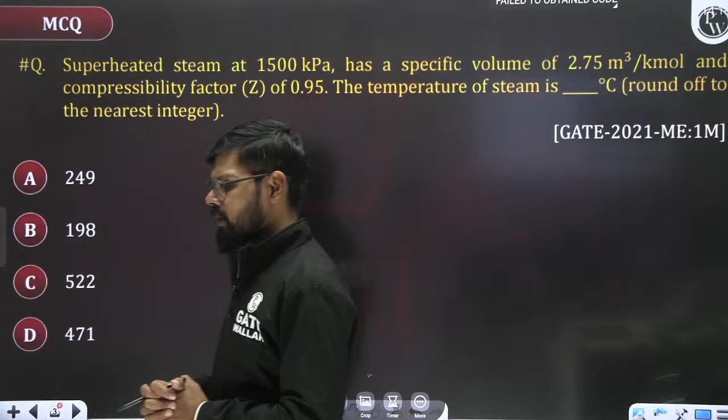In the first chapter of basic thermodynamics, mostly it is about basic concepts. In this chapter the most important topic is ideal gas, properties of ideal gas, and its mixture. I hope you know about it. So let me start with the very first question.

Here it is given that superheated steam at 1500 kilopascal has a specific volume of 2.75 meter cube per kilomole. So superheated steam at 1500 kilopascal.

So P value is how much given? Let me write here: P value is given as P = 1500 kilopascal, has a specific volume of 2.75 meter cube. Specific volume means V = 2.75 meter cube per kilomole. This is a specific volume given per mole.

It is given per mole, and the compressibility factor Z is given as 0.95. Now you need to find out the temperature of the steam. This superheated steam can be considered as an ideal gas. Even if it is not ideal gas but compressible, the compressibility factor is given, so we'll apply PV specific volume = Z R bar T.

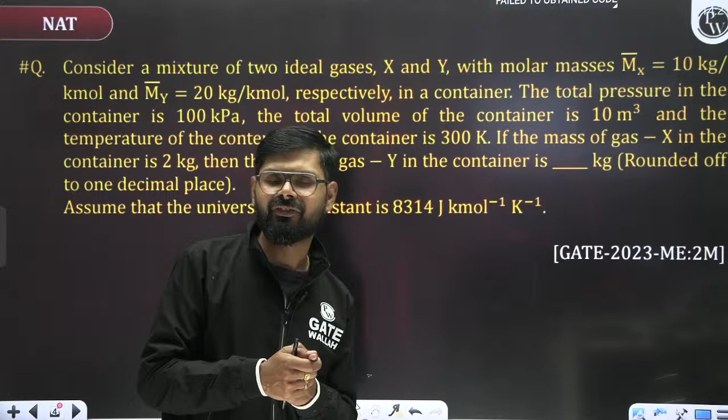The second topic is ideal gas and properties of ideal gas. The third one is thermometry or measurement of temperature, zeroth law of thermodynamics. But out of these three, the most important topic, meaning 70-80% chances if a question comes from the first chapter, it will come from ideal gas and its properties. Okay, just solve this particular problem.

Here it is given that consider a mixture of two ideal gases X and Y, with the molecular mass given. So molecular mass is given as 10 kg per kilomole, 10 kg per kilomole. This is the molecular weight of X.

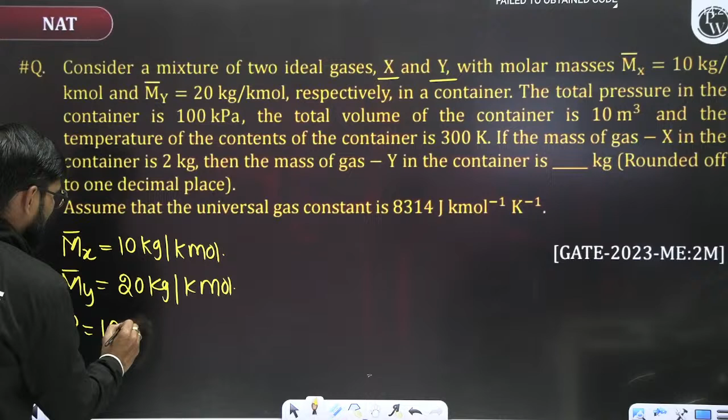Okay, so now look here. What is given? Mx value is given as 10 kg per kilomole, and the molecular weight of another gas Y is given as 20 kg per kilomole respectively in a container. The total pressure in the container is given as 100 kilopascal. The total volume of the container is 10 meter cube.

And the temperature of the contents of the container, what is the temperature value given? T is equal to 300 Kelvin.

Now, if the mass of the gas X in the container, mass of gas X, small m is representing what?

Today some problem happened, right? But okay, thank you Kuldeep Singh sir. Kuldeep Singh sir is the king of information, I think everyone knows about him very well.

So if I write the Mx value, what is the value of mx? Mass of X gas is 2 kg, and mass of Y you need to find out. This you need to find out. Solve it.

Everyone please solve this, it is really a very good question, a very good problem. See here, mass of X value is already given, and you need to find out the mass of the second one.

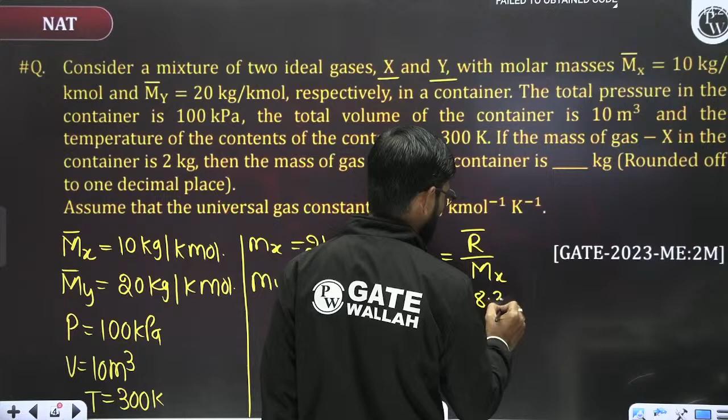R bar by molecular weight of x. R bar value is 8.314 divided by 10. This value will come to 0.8314.

And then Ry value will come how much? 20 by... 8.314 divided by 20, so this value will come 0.4175. This is kilojoule per kg Kelvin.

Now total pressure value is given. So first calculate the partial pressure of X gas, which is in kilojoule per kg Kelvin. Now apply PV is equal to MRT for X gas.

So PxV is equal to Mx Rx T. So Px value we need to calculate. No, I think Px value is not known. What is given? Total pressure is given. Okay, so we calculate Px value.

So Px, volume value is 10 meter cube. Mx value is how much? Mx value is also given, that is 2 kg. Into Rx value is 0.8314, and temperature is how much given? 300 Kelvin, 300 Kelvin. So what is the value of Px?

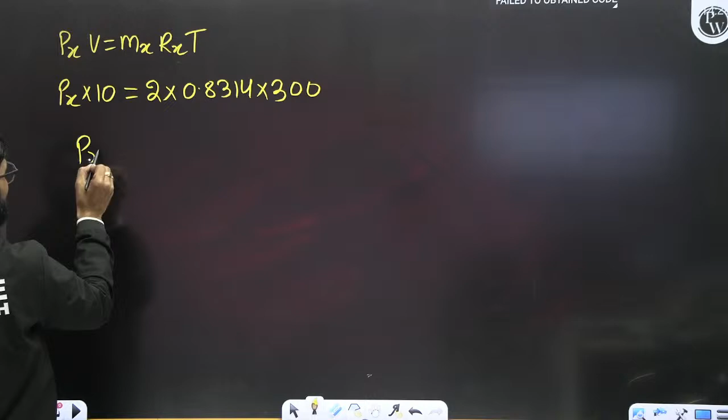Px value will come as 30 into 2 into 0.8314. So this value will come 49.884 kilopascal. Now total pressure is given how much?

Total pressure is given 100 kilopascal, right? 100 only, total pressure, that is equals to Px plus Py, Dalton's partial pressure law. So Py value will come how much? Py value will come 100 minus this, so you will get 50.116 kilopascal.

Now apply ideal gas equation for Y. So you will get Py V is equal to My Ry T. So Py value is how much given? 50.116. Volume value is same, 10.

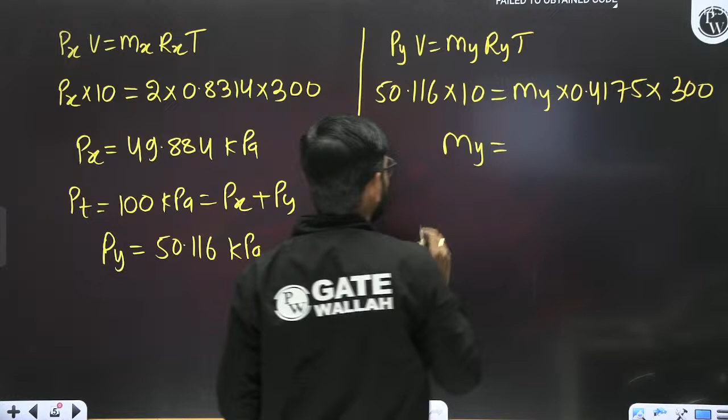My value you need to calculate, and Ry value was how much? 0.4175, into temperature. Temperature is how much given? Temperature is given as 300, right? This will become 300. So calculate my value into 10 divided by 0.4175 divided by 300. So this value will come 4 kg.

Is everyone clear? Another approach: total moles calculated first, then total mass by molecular weight. That is also fine, that is also correct. Thumbs up for you, that approach is correct. It is completely right, no problem.

Okay, just solve this problem. It is based on the mixture of ideal gases. This is also really a very good problem. Solve this.

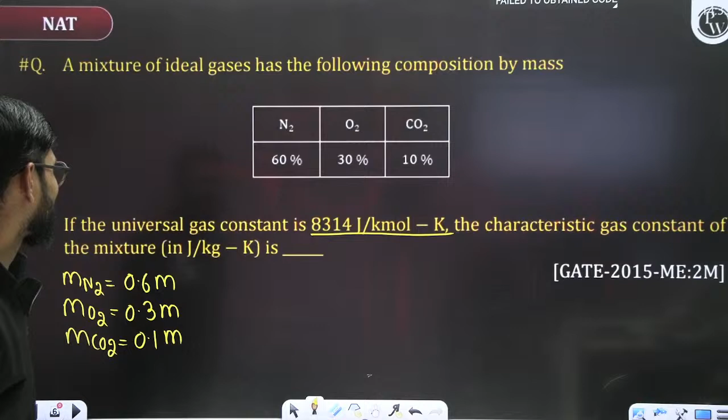If the universal gas constant value is given as 8314 joule per kilomole Kelvin, you need to find out the characteristic gas constant. Total mass is M.

So characteristic gas constant, how to calculate? Characteristic gas constant of mixture: R of mixture formula is M1R1 plus M2R2 plus M3R3, divided by total mass M.

So mass of N2, let's suppose this is M1. Let's suppose this is M2. Let's suppose this is M3. So basically it is 0.6 mass fraction. 0.6 is nothing but the mass fraction. Just put the values.

So R of mixture is equal to M1 by M value is 0.6 for N2 into R value, which is R bar by capital M, i.e. 8.314 divided by 28, plus 0.3 into 8.314 divided by 32, plus 0.1 times 8.314 divided by 44.

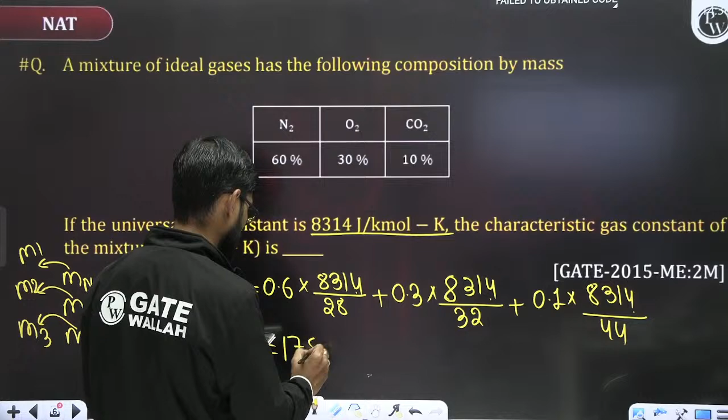178 point... 8314 by 28 into 0.6, this value will come to 178.157, plus 8314 divided by 32 into 0.3.

77.94, plus 8314 divided by 44 into 0.1 equals 18.89, plus 77.94, plus 178.157. This value will come approximately 274.9 to 275 joule per kg Kelvin.

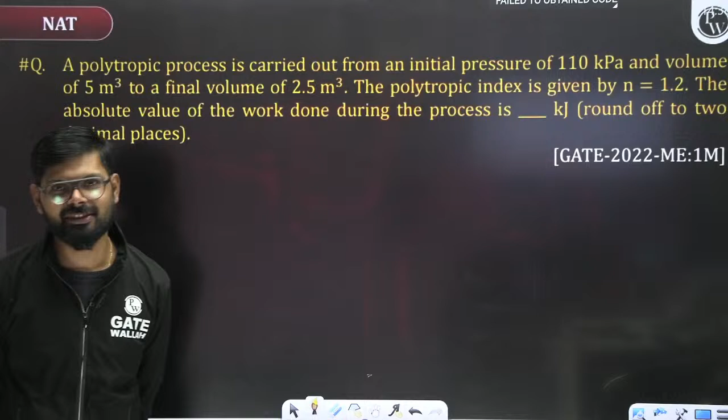Now this problem basically belongs to work and heat. Yeah, Hindi is your matrabhasha, that is fine, but English is a professional language, and this session belongs to English, so this particular channel is about English. We need to talk in English only, that is the only option available to us.

Okay, just solve this please. A polytropic process is carried out from initial pressure of 110 kilopascal, volume 5 meter cube. So P1 value is 110 kilopascal and volume V1 is 5 meter cube. The final volume V2 value is 2.5 meter cube. The polytropic index N value is also given as 1.2. So what you need to find out is the absolute value of work done for the polytropic process.

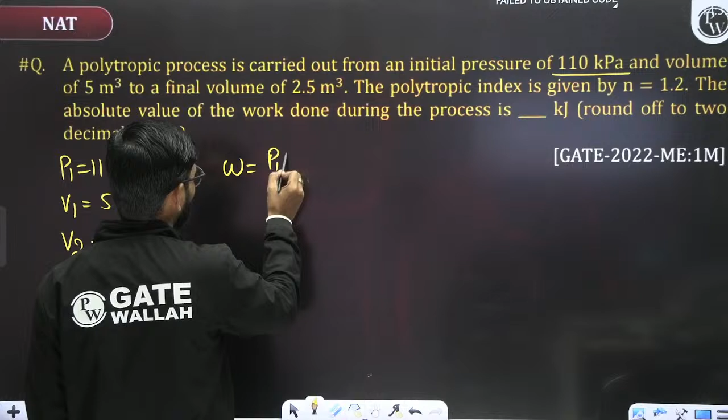Okay, so here W value for polytropic process is P1V1 minus P2V2 divided by N minus 1. So P1 value is 110 into V1 value is 5, minus P2. P2 we don't know, bhaiya.

P2 we don't know, okay so apply here: P1 V1 to the power N is equal to P2 V2 to the power N. So P1 means 110 into V1 5 to the power n value, 1.2, is equal to P2 times 2.5 to the power 1.2. So what is the value of P2? Let someone please tell me the value of P2.

Brahma, today's target for Brahma is that Shivam sir should speak in Hindi.

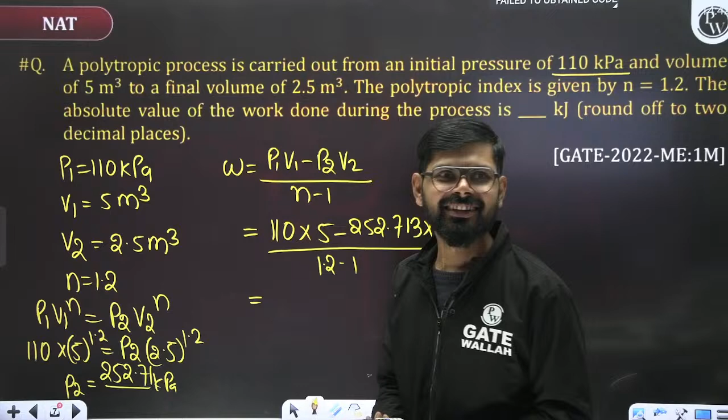408.9 unit. Unit, tell me, Bhavya.

Okay, not only name, personality should be also same. See, whatever you will write, I am not going to speak Hindi. Let me know, right? I am telling you.

Okay, just solve this particular problem. Just solve this particular problem.

Let's solve this particular problem. 1 kg of air initially at temperature 127 degrees centigrade. T1 value I can write as 127 degrees centigrade plus 273, which gives 400 Kelvin. It expands reversibly at constant pressure, until the volume V2 becomes 2 times of V1.

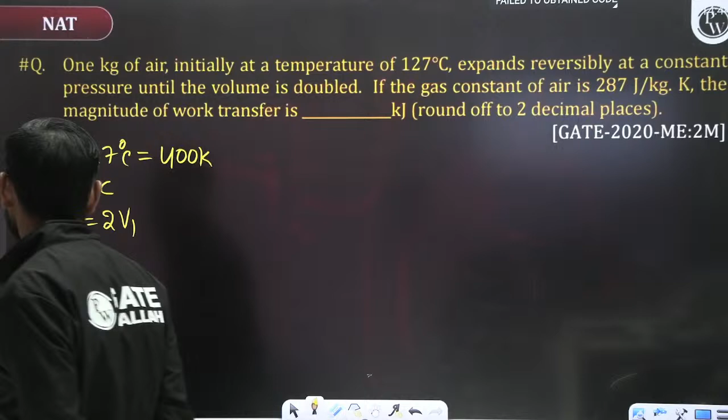Okay, solve this one. If the gas constant R value is given as 287 joule per kg Kelvin, find the magnitude of work. The work value is very simple here: we can write W equals P into V2 minus V1. This can be written as P2V2 minus P1V1, because P1 is equal to P2 is equal to P.

Mahesh Babu is saying that he is feeling fear of the exam. It's very common, and you are not the only one feeling this way. As the exam gets closer, you will have fear and anxiety, but don't worry and don't think much about the result. Just do your work, and trust that whatever you studied will come in the exam. You have to practice well and revise, solving more problems.

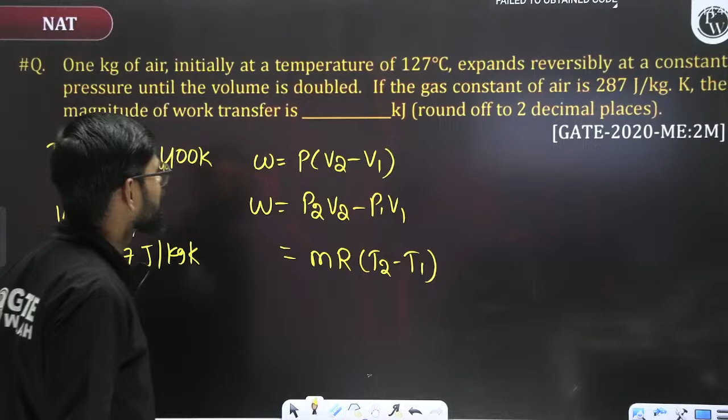So P2V2 minus P1V1 can be written as MR times T2 minus T1. Here two things you need to understand: mass is given as 1 kg, and R value you have to write in kilojoule per kg Kelvin, so this value will be 0.287.

And T2 value we don't know, right? So as the pressure is constant, temperature is proportional to volume. So T2 by T1 is equal to V2 by V1, and it is given that V2 equals 2V1, so V2 by V1 equals 2.

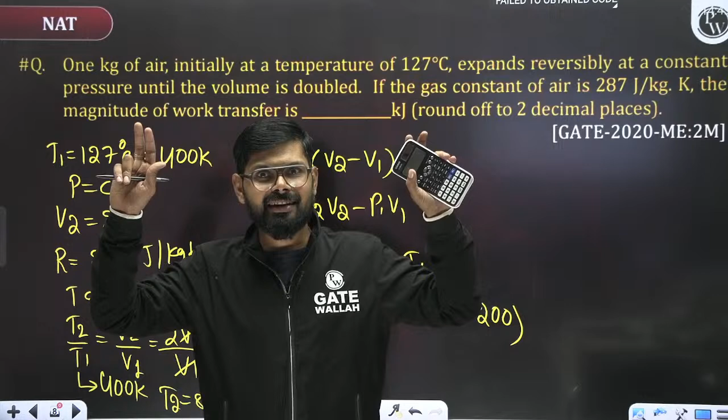One more suggestion to everyone: please try to keep yourself engaged throughout 24 hours, either sleeping or doing work related to GATE preparation. You have to engage yourself, but not in any other kind of work. Let's say you decide to play cricket to engage your mind, but after 2-3 hours you will feel anxiety again, because you wasted 3 hours of your time. My suggestion is you have to keep yourself engaged related to this exam. Don't do anything else - only sleep, only eat food, and study. That's it, only these 3 things for the coming 20-25 days.

Don't do anything else. What is the final answer you are getting? 114. I feel I'm assuming that you are giving the right answer.

Okay, 800. I'm assuming that you are giving the right answer. Rohit Vishwakarma, are you getting it? Okay, Rohit Vishwakarma is giving the answer as 114, so I'm assuming this answer is going to be correct.

For refresh, play half an hour - is that enough to play or not?

Tanmay Chandrakant Bari, if you can restrict yourself to half an hour, then it is fine. But I have seen that most people think they are going to play cricket or badminton for half an hour, but they end up spending more than 2 or 3 hours.

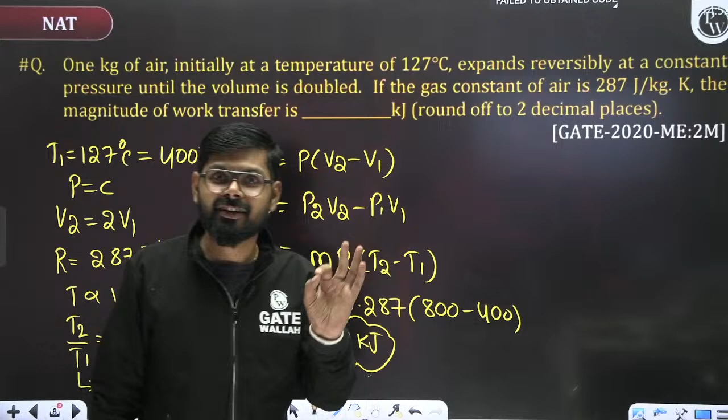Even if you are playing for half an hour, there must be a proper distance between you and your girlfriend. If it is your girlfriend, then there should be a proper distance, right? If she is not your personal girlfriend, if she is someone else's girlfriend, then you can chit chat for some 15-20 minutes, no problem. So if she is your personal girlfriend, no chit chat, strictly tell her that for the coming 20-25 days I am not going to talk to you.

But if she is not your girlfriend, if she is someone else's girlfriend, then you can chit chat a little bit, no problem, because it will be refreshing. See, someone else's girlfriend can refresh you, but your own girlfriend will only give you tension. This is my personal experience.

Let me move to the next problem. Why are you people always talking about these things? My mind gets distracted sometimes.

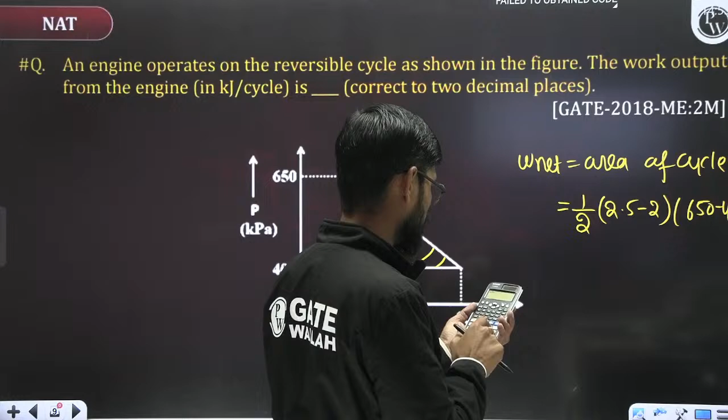What is the area of cycle? Half base into height. So half base: 2.5 minus 2, into 650 minus 400. So this becomes 250, I hope so. 250 into 0.5 divided by 2, so this becomes 75... 62.5 is the correct answer. Yes, 62.5.

Yeah, what Billa is saying, let me read the Billa statement one more time, because Billa has a very mischievous mind.

Please try to understand, you are wrong, Mr. Billa. Billa is saying that there is a quote: behind every successful person, there is a woman. But always remember, there is a woman, not a girl. That woman is basically either your wife or your mother, right? But it should not be your girlfriend. I'm sure it is not your girlfriend, right?

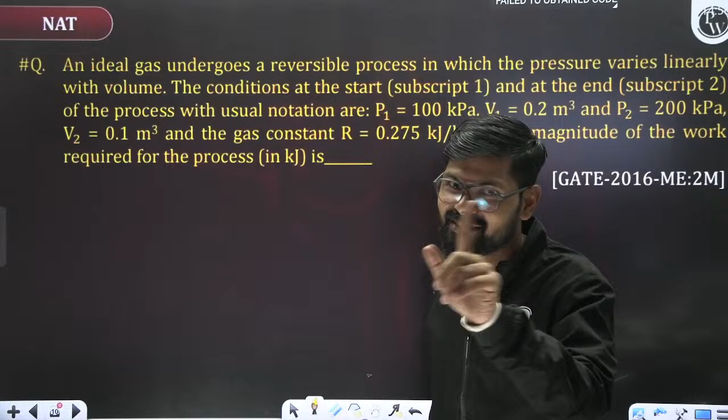So always read the statement clearly, right? What is the statement? No, I'm not exaggerating anything. I'm simply saying that the statement itself says that behind every successful person there is a woman, not a girl, right? So if your girlfriend says I am behind your success, just ask her, are you a woman or a girl? If you are a woman, then you are behind my success. If you are a girl, then it's not. So my mother is behind my success.

Okay. Billa is... Hey, Billa, I'll kill you.

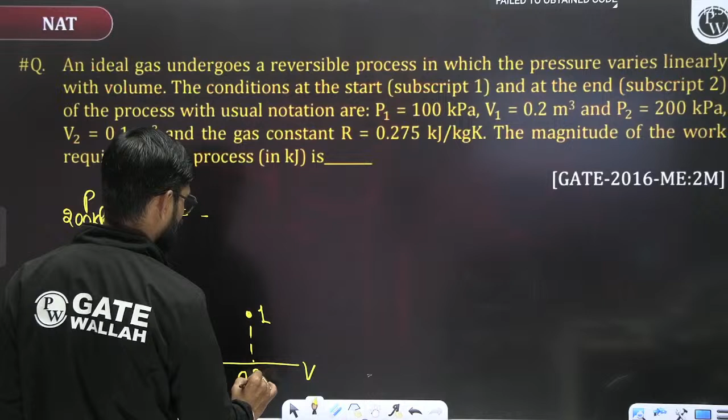And this volume is how much given, 0.2 meter cube, right? And the volume basically decreases. So point 2 basically, and this volume is 0.1 meter cube, right? And the process is given as a straight line.

So we need to find out what is the work. Area under the curve, when projected on the volume axis in a PV diagram, gives the closed system reversible work. So this is W1 to 2, magnitude only we want, so just calculate the area.

So area will be half of this plus this, meaning 100 plus 200 into 0.2 minus 0.1. So this becomes 0.1, 300, 150, 150, 15, I think so, right? 15 kilojoule.

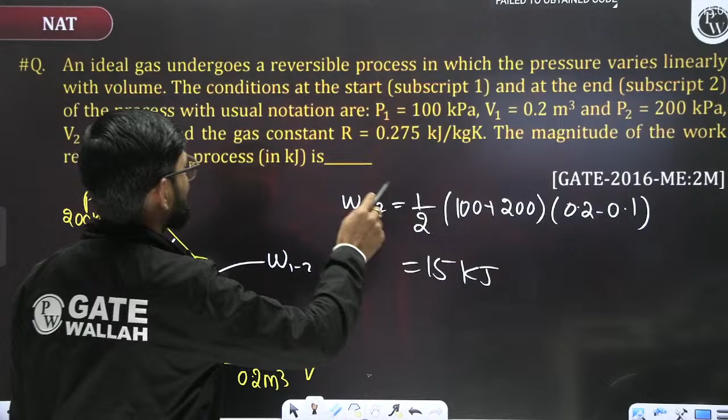It undergoes a reversible process in which pressure varies linearly, and isothermal process is a rectangular hyperbola. Uranium 235, please listen here.

It is given that pressure varies linearly, a linear variation between pressure and volume. So it will be represented as a linear line in a PV diagram. And isothermal process is not a linear process, it is a rectangular hyperbola in the PV diagram, PV equals constant, a rectangular hyperbola.

This is one of the very, very beautiful problems, one of the most beautiful, most rank-deciding type of problem. This is basically a rank deciding type of problem asked for GATE, for 2 marks.

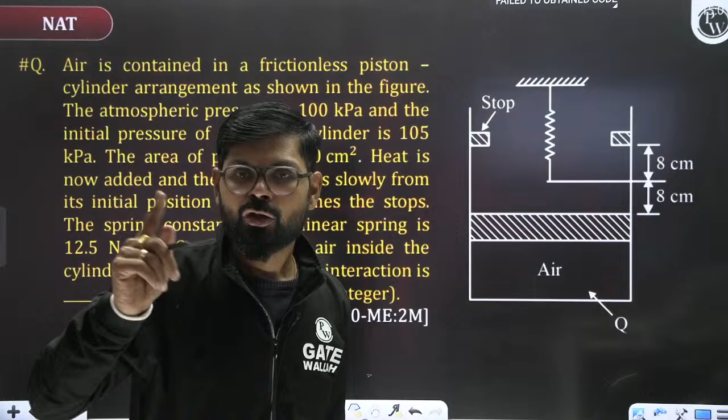So now when you start adding heat here, first the piston is free to move, so there will be constant pressure initially... you see constant pressure, constant pressure, constant pressure up to here. After that the spring starts getting compressed. I already told you, compression of a spring follows a linear variation between pressure and volume, represented as a straight line in a PV diagram.

So at the start, listen here: constant pressure, constant pressure, constant pressure. Now pressure will increase linearly, pressure increases linearly, right? So this kind of process is going to take place.

Air is contained in a frictionless piston-cylinder arrangement as shown in the figure. The atmospheric pressure is 100 kilopascal, and the initial pressure of air in the cylinder is 105 kilopascal. Why? Because 100 kilopascal is atmospheric pressure and 5 kilopascal is due to the weight of the piston.

The area of the piston is given as 400 centimeters square. Area is given, so initial volume is not required, don't worry. Heat is now added and the piston slowly moves from the initial position until the final stop. The spring constant K value is also given.

K value is also given, but you need to check the unit. This unit is correct, Newton per mm only. Let me check once. Yeah, Newton per mm, correct.

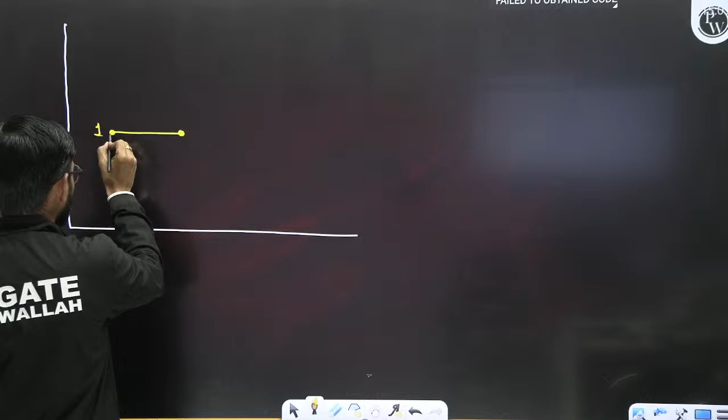So initially pressure is 105. From here it is moving 105 to 8 centimeter. So this will become, let's say this is 0.1, and it is changing from 1 to 2, 8 centimeter distance. Here volume is V1, here volume is V2, and this distance is not volume. Volume change you can write as area into 8 centimeter. This is pressure, 105 kilopascal.

Now right now 8 centimeter, again it is compressing the spring. So spring compression is a linear process. So this is point 3. So what is V3? Now what is V2 minus V3? This is again area into 8 centimeter, area into 8 centimeter.

Final pressure is how much? Now calculate final pressure value. Final pressure will be initial pressure 105. P3 I am talking about. P3 value will be initial pressure plus spring force by area. Now what is spring force? 105 plus spring force K into X, Kx. So 12.5.

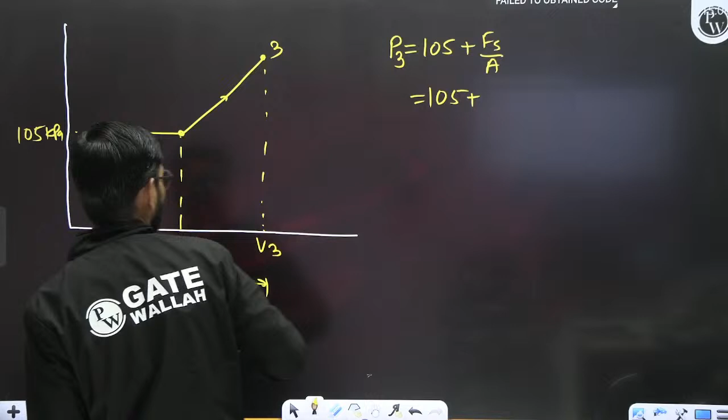K, this is K value into X, but you have to write X in mm. So basically how much centimeter it is moving? 8 centimeter. 8 centimeter in mm will come how much? 80 mm. So multiply with 80 mm. So this will come in joule, I think, or Newton. It will come in Newton. It is in Pascal, so write in kilopascal itself.

Sorry, write in Pascal. So 105 into 10 to the power 3. Divided by area. Area is how much? 300 centimeter square. So 300, this value will come in Newton, and we want Newton per meter square. 300 into 10 to the power minus 4. So 300 centimeter square, yes.

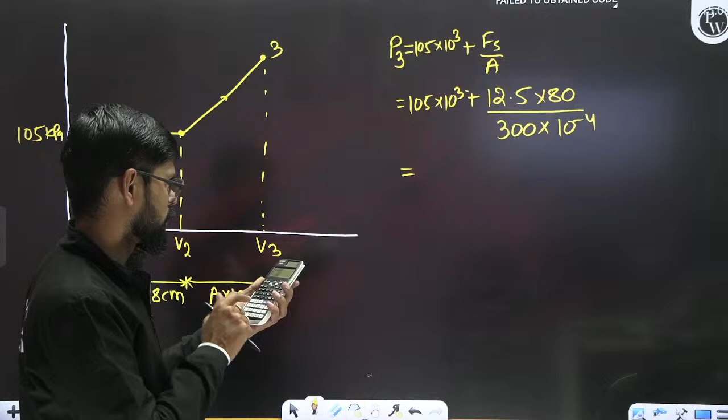So this is going to be final pressure, P3 value. So P3 value is how much? 12.5 into 80 divided by 300 into 10 to the power minus 4. So this will become 33,000. So this can be 10 as we want 10 to the power 3. So it will come 105.

Into 10 to the power 3 Pascal plus 33.33 into 10 to the power 3 Pascal. So 105 plus 33.33, 138.33 into 10 to the power 3 Pascal.

We want the answer in joule. So what we need to calculate? We need to calculate the work. So work value will be how much? This area represents work W. So let me calculate this rectangle first. First I am going to calculate this rectangle area, then this triangle area.

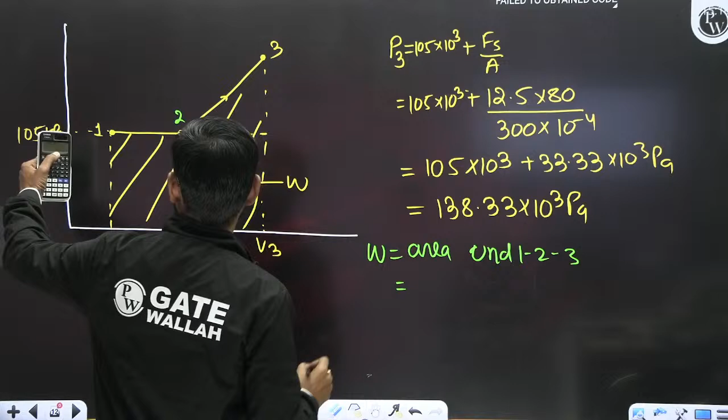So W is equal to area under 1, 2, 3. So area under 1, 2, 3 value will come how much? 105 into 10 to the power 3, because we want in joule. V3 minus V1, into V3 minus V1, V3 minus V1 we can.

Here 8 is there. Sorry, here 8 is there. Plus half base into height. P3 minus P2 into V3 minus V2. Just put the values. You will get 105 into 10 to the power 3. Here it will come total this area, this volume means 16 centimeters. So write in meter. 16 centimeter means into 0.16 times of area. Area will take it out, plus half base into height.

So 138 minus 105, so 33.33. This value will come 1 by 2 into 33.33 into 10 to the power 3 to V3 minus V2 is A into 0.08. Outside is area. So just write here 105 into 0.16. So this value will come 16.8, plus this value is how much?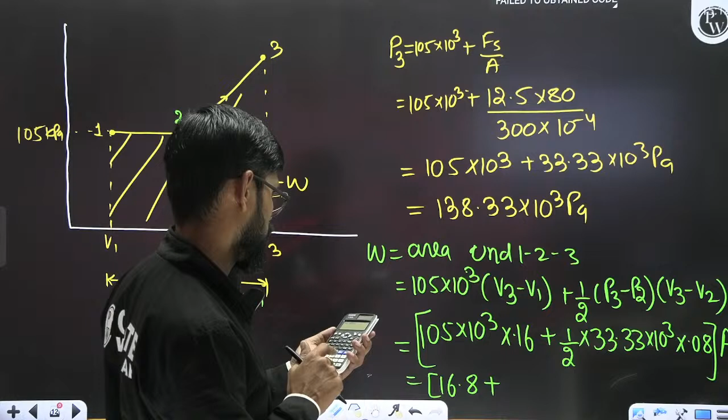16.8. How much this value? Okay, Vignesh, I'll let you know, don't worry, I'll tell you. Then this value is 33.33 into 2 into 0.08. So this value will come 1.33, and here 10 to the power 3 into area is how much? 300, na? 300 into 10 to the power minus 4.

So means 30 value will come, that is 30 plus 16.8, 30. How much final answer you are getting? The final answer is W is equal to, as per my calculation, maybe wrong also, 1164 joule. Is it correct? Let me know. 664. Is it correct? No. 544. Oh my God, maybe some mistake.

Let me check. Someone is asking how I drew this diagram. See, initially piston is at this position. When you add heat, then piston will move upward and reach to this particular point. So up to 8 centimeter, up to 8 centimeter. What did I say?

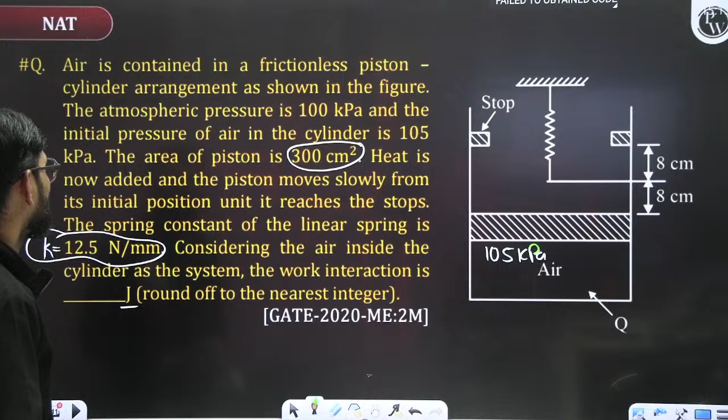I don't feel the pressure in the cylinder is 105. It is not mentioned that it is a gauge pressure. It is not mentioned that it is a gauge pressure. It is not mentioned. No, it is correct only.

P3 value is absolutely correct. Just check the area once. So area value is V3 minus V1. What is V3 minus V1? 8 plus 8 equals 16 centimeters. So 16 centimeters, I write 0.16, correct only. P3 minus P2 is 33. P3 and this one is 0.08 area. Everything seems correct only.

P3 value, check. P3 value will be how much? P2 value is how much when the piston will reach here. Right, when the piston is reaching here, at that moment pressure plus increase in pressure Kx. When Kx spring is going to be compressed, spring is going to compress by Kx.

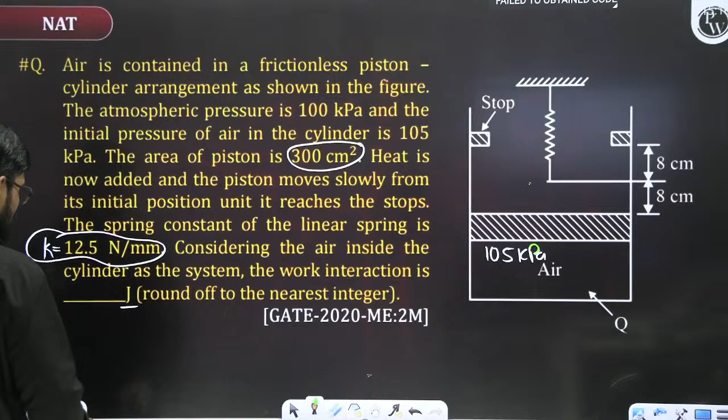That's why this value is coming. So initially, when the piston is just touching the spring, then pressure was 105 into 10 to the power 3. Then it is further moving 8 centimeters. Yes, 8 centimeters means 80 mm. Fine, so this is the correct answer.

This calculation you just check once, maybe the calculation may be a little bit wrong. 105 into 0.16 equals 16.8. Calculation, please check once.

P3 plus P2, where P3 plus P2? No, I am calculating only this area, the P3 minus P2. You check the calculation once, bhaiya.

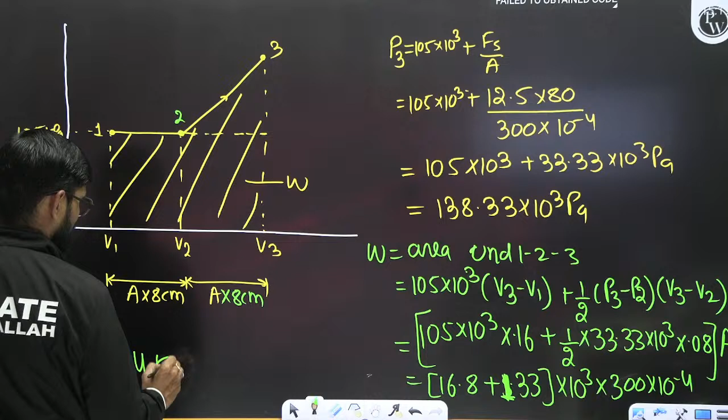TPM is talented, all other people are... TPM is going to get rank. TPM, how much marks are you getting in the test series? Tell me, TPM, how much marks are you getting? And what is your exact name?

Okay, let's solve this problem.

Tiffany Mohan. Oh, okay. Sorry.

Solve this problem. A frictionless piston cylinder device contains gas initially at 0.8 megapascal and 0.015 meter cube. So what is given initially: P1 value is 0.8 megapascal, meaning 0.8 into 10 to the power 3 kilopascal, and volume value V1 is given as 0.015 meter cube. It expands quasi-statically at constant temperature to the final volume, which is given as 0.030 meter cube. The work output during the process will be?

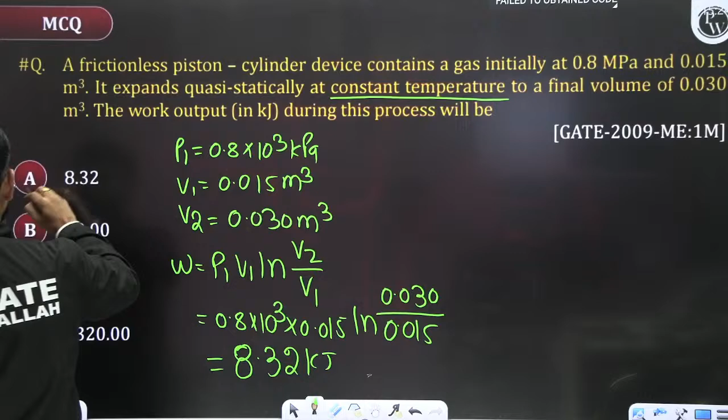Hani, TPM, tell me how many marks you are getting on average. If you need any help in maths, we will help you.

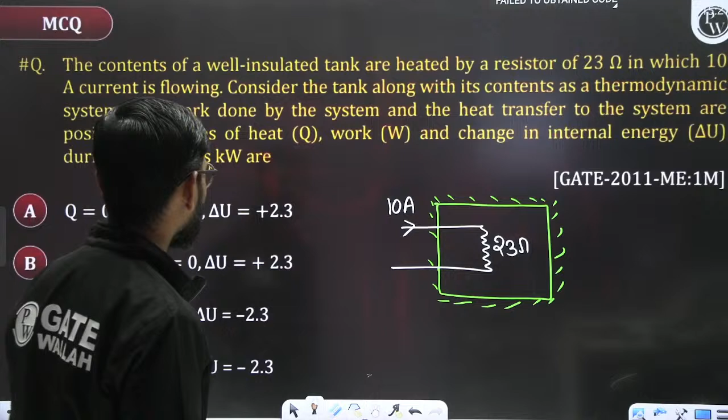The first thing first, it is an insulated tank, so Q is going to be completely zero, surely zero. Now how much work are we supplying? So work input will be how much?

I square R in watts. I square R means 10 square into 23. So this value will come: 10 square is 100 into 23 equals 2300 watt, which is 2.3 kilowatt.

Now it is actually work that is being supplied, electrical work we are supplying. Work supplied on the system is negative, so this is going to be negative. And dQ is equal to dU plus dW. So dQ value is 0, is equal to dU plus 2.3. So dU value will come to 2.3 kilowatt.

So I think W value is going to be negative and dU value will be positive, and Q is 0. So W negative, dU positive and Q zero - A is the correct answer.

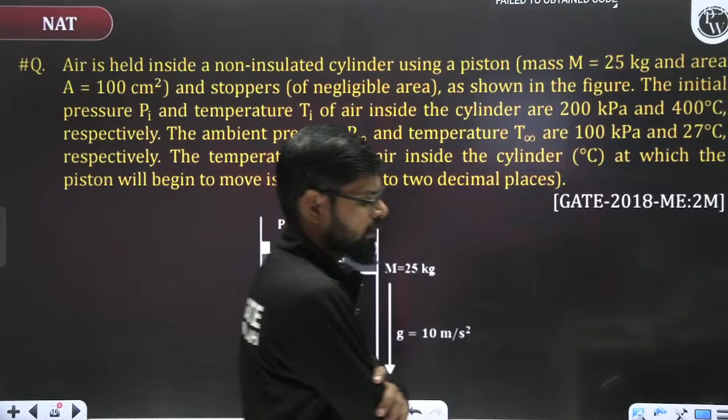Okay, the temperature inside the cylinder at which the piston will begin to move, right? So when the piston begins to move, understand, when the pressure inside the cylinder is exactly equal to the atmospheric pressure, it will just start moving, correct? So at that moment, what will be the temperature they are asking?

So what is the initial here? Pi value is how much? Pi value is 200 kilopascal, right? So please try to understand, if I draw here the PV diagram, let's say this is the initial pressure here, right? Initial point is this one, Pi.

Now, you can draw here, no problem. Now we are rejecting the heat.

No, it is given insulated or non-insulated? Yeah, it is non-insulated. The initial temperature in the ambient is this one. So obviously it is non-insulated, meaning heat is going to be rejected because inside temperature is 400 degrees centigrade, outside temperature is 27. So the heat is going to be rejected from here.

But the piston will not go down because the piston will start moving only when the pressure inside the cylinder will be 100 kilopascal. So it will be constant volume cooling up to this particular point, final. So here initial pressure is 200 kilopascal, and final pressure is going to be 100 kilopascal, right? Clear?

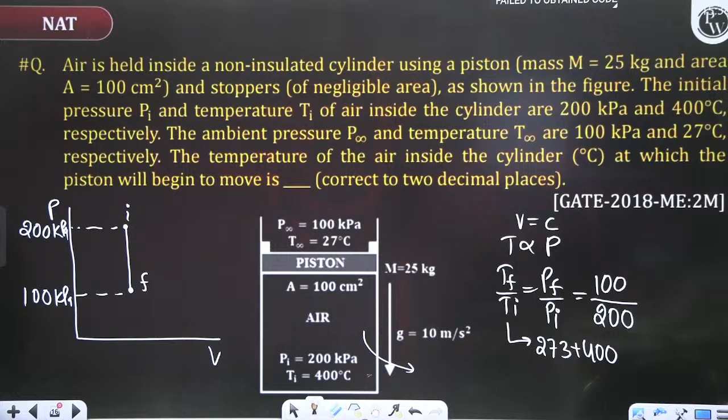So calculate P final, please calculator. Mass of the piston, final pressure is 125.

Piston mass is okay, piston mass is also given. So final pressure will be how much? Inside pressure will be 100 kilopascal. This pressure will be 100 kilopascal. Inside pressure will be 100 kilopascal plus pressure due to weight of the piston.

So pressure due to weight of the piston will be Mg by area. Mg by area. So Mg by area will come how much? M value is given as 25 into G, 9.81. Area is 100 into 10 to the power minus 4. And this divided by 1000. So this value will come to 124.525 kilopascal.

125, sorry, so this will be 124.5, right? So final pressure will be 124.525. Now tell me what is T final value. Oh, G value you need to take as 10. G value is also you need to take 10. So it will come 125 exactly. This value will come 125 kilopascal.

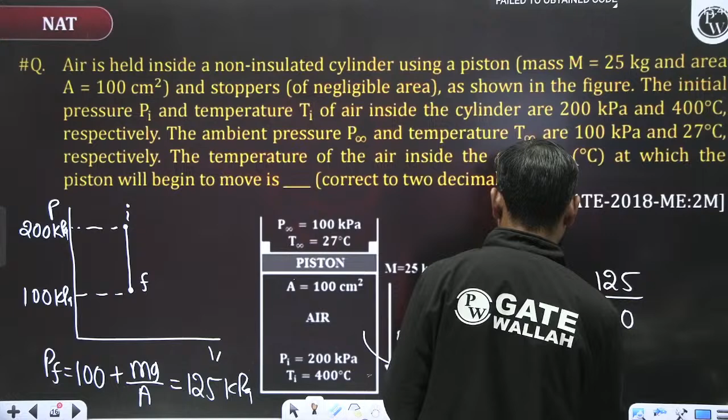125 divided by 200. This value will come to 420.625 Kelvin.

And the answer, they are asking in which unit? Degree centigrade, minus 273. This will become 147.625 degree centigrade. This is going to be 147.625. Correct.

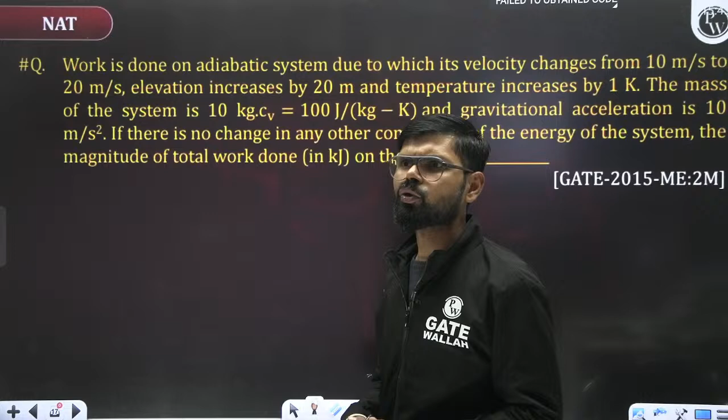Like PYQs of those subjects, extra problems of those subjects, subject-wise tests, revision, short notes, everything - 7 subjects should be completely solid. From those 7 subjects, let's say 70 marks are coming, for example. So at least you will get nearby 55 to 60 marks. So if you have completed 7 or 8 subjects only, just make it solid.

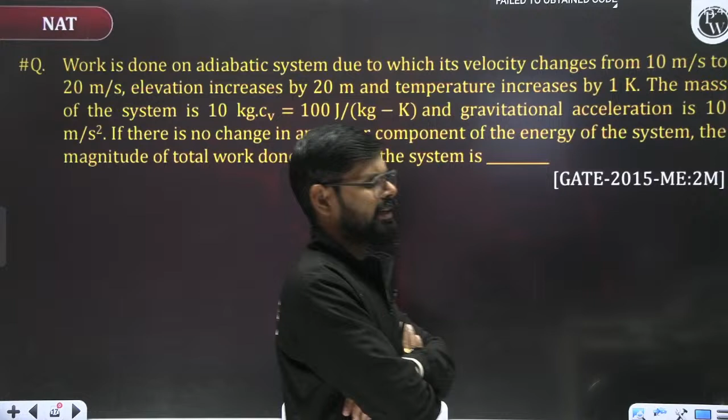Fluid machinery - you can leave it, no problem. Utkarsh Reddy, if only fluid machinery is remaining, then hardly 1-2 marks will be asked from fluid machinery. And if you are going to study fluid machinery now, then it will consume minimum 20-25 hours. So out of this 20-25 hours, you can easily revise 2-3 subjects. So if you are left with some of the topics, some of the less important subjects like hydraulic machines or any topic, then you can leave it for the time being. You can leave it, no problem. You need not get 100 out of 100.

Head loss varies very linearly with velocity. Why? How is head loss going to vary linearly? You have to show me the question, because V is equal to under root 2GH, na. V is equal to under root 2GH. So how is it going to vary linearly?

I don't feel so. Just share me the question, then I'll let you know. I don't feel that this condition will be satisfied.

Okay, work done in an adiabatic system due to which the velocity change is from 10 meters per second to 20 meters per second, and elevation change is 20 meters. Okay, the temperature changes by 1 Kelvin. Okay, the mass of the system is fixed mass. Is it an open system or closed system problem? Is it an open system or closed system problem?

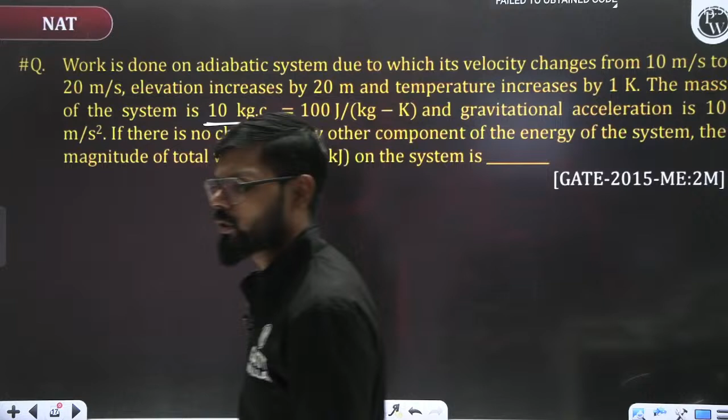Okay, in a pipe, yeah. But he should say pressure head, na. He's saying velocity head - velocity head or pressure head loss? Pressure head loss, okay - so tell me, pressure head loss is varying linearly in the pipe. Yes, correct, I thought you are talking about velocity head. Pressure head will vary linearly in a horizontal pipe due to friction.

Okay, listen here carefully - so this is basically which kind of problem? This is basically a closed system problem, but you have to apply dQ is equal to dE plus dW. dQ is equal to dE plus dW. Now, dE is equal to two things - dU plus d of kinetic energy and d of potential energy. Now, work done in an adiabatic system - since it is adiabatic, dQ value is going to be 0 first of all. Velocity changes from 10 meters to 20, so how much will the kinetic energy change be?

Half m, final velocity will be how much? Half final kinetic energy, v2 square minus initial v1 square, and elevation increase. This is a change in kinetic energy. Change in potential energy is mg delta h. mg delta h, du value is how much?

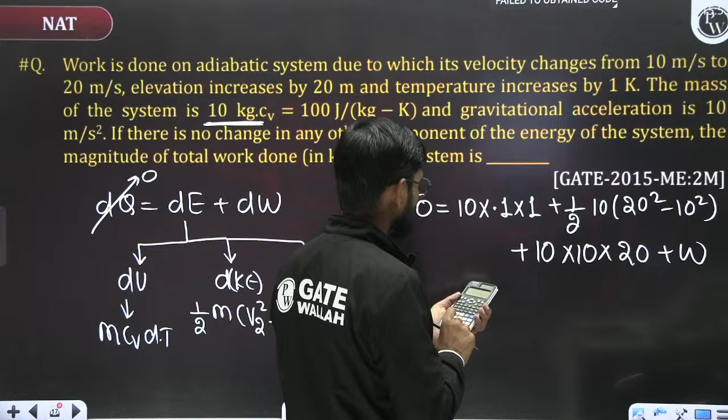So just calculate this. Just calculate this. 10 into 0.1, this value is 0 is equal to 1 plus 20 square minus 10 square into 5. Okay, this will come 1500, but this is mcv delta T joule.

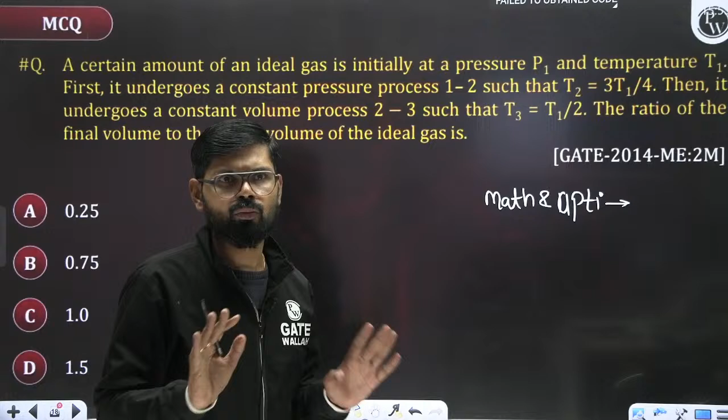Maths, APT, see here, practice math and apti well. Math and APT, anyhow by math and APT, make your mind comfortable and try to solve more and more questions. Mr. Manish Singh, whatever subject you completed up to now, that is more than enough to get 45 to 50 marks.

How? So try to get habit of this 20 marks from here. Give more and more test series. See, if you like, whenever you are giving even full length test na, then also your target is to get only 50 marks, right? Don't bother much. Maths aptitude 20 marks you need to get, right? Anyhow, right, out of 28 marks, right?

And then TD, ATD is also completed. Only BTD completed or ATD also completed, right? So as per my analysis, if you have completed TD, complete TD, matlab BTD as well as ATD, 10 marks, then HMT 5 marks, 15, and then SOM again 20, SOM production again, production. From here again try to get 25 marks. Try to get 25 marks from technical. Easily you will get, just practice well, you will get it.

A certain amount of ideal gas initially at pressure P1 and temperature T1, first undergoes a constant pressure process 1 to 2. Okay, so first process is constant pressure, where this is 1 to 2, TS diagram. Initially we undergo constant pressure process. Now here temperature, you can see that temperature decreases. So constant pressure cooling basically, right? It is constant pressure cooling basically.

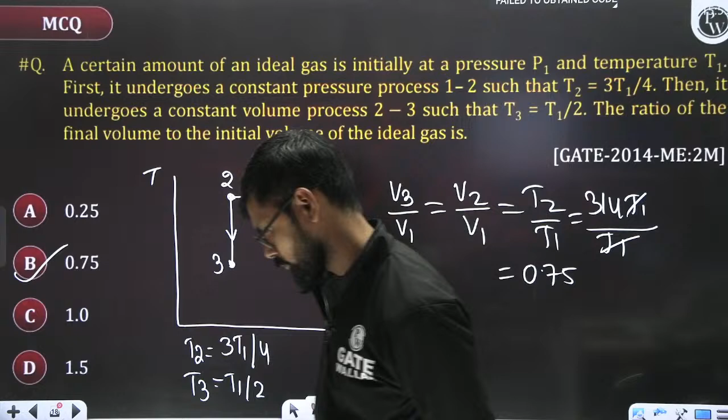Now we'll solve. Everyone got this? Okay, now we'll solve a few questions based on open system problems. Let me solve some open system problems for you.

You cannot solve with SFE, Utkarsh Reddy, why? Because fixed mass is given. Fixed mass means, if you do it, you will get the same answer. Good point, Utkarsh Reddy. If you do it, you may get the same answer, so there will be no problem in gate exam. But if it is some conventional type of exam where you have to write, then they may deduct some marks. Actually, the problem belongs to closed system because fixed mass is given, but fine, for gate perspective, there is no issue at all.

A gas is heated in a duct as it flows over a resistance heater. Consider a 101 kilowatt electric heating system.

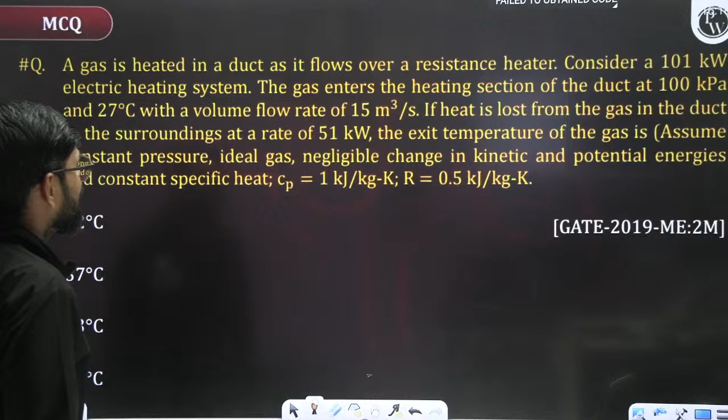What is the final answer for this particular question? A gas heated in a duct flows over a resistance heater. Consider a 101 kilowatt electric resistance heater. So let's say this is a duct, and this is something like this, and here energy supplying is 101 kilowatt.

The gas enters the heating section of the duct at 100 kilopascal, 27 degrees, and the volume flow rate is given, so the mass flow rate can be calculated. P1 V1 dot equals M dot R T1. So M dot equals P1, that is 100, into V1, V1 value is 15 meters cubed, divided by R value 0.5 and T1 value 300 Kelvin. So this comes out to 10 kg per second.

Now if heat is lost from the gas duct, some heat is going outside also, that is 51 kilowatt. The exit temperature of the gas at constant pressure, ideal gas, negligible change in kinetic and potential energy, so we neglect kinetic and potential energy here. So M dot into H1 plus Q dot equals M dot into H2 plus W control volume dot. So I can write M dot into H1 minus H2 as Cp into T1 minus T2. This will come to minus 51, and since we are supplying, minus 101, so this goes to the other side. So Cp value is how much?

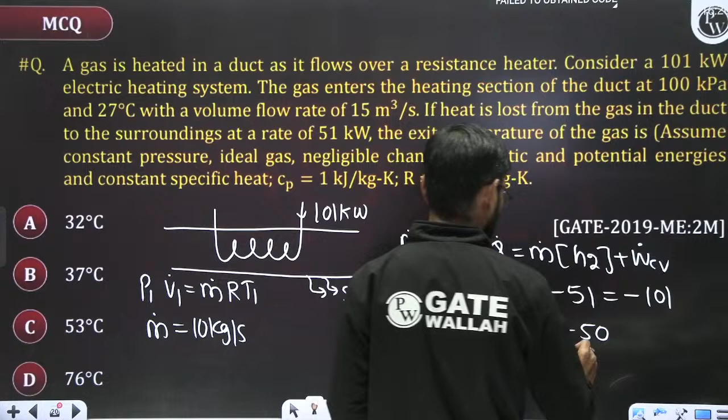Cp value is 1. So 1 into T1, T1 value is 300, minus T2 equals minus 50. Minus 50 by 10, so this is minus 5. So T2 value will be 305 Kelvin, or 305 minus 273, so this value comes to 32 degrees centigrade. I hope A is going to be the correct answer, everyone. A is going to be the correct answer.

H2 has not cancelled. We are taking M dot H2 to this side. So H1 minus H2 will be Cp dT, Cp dT.

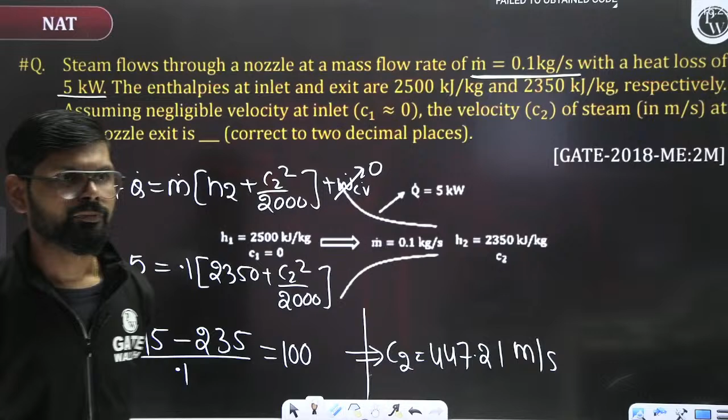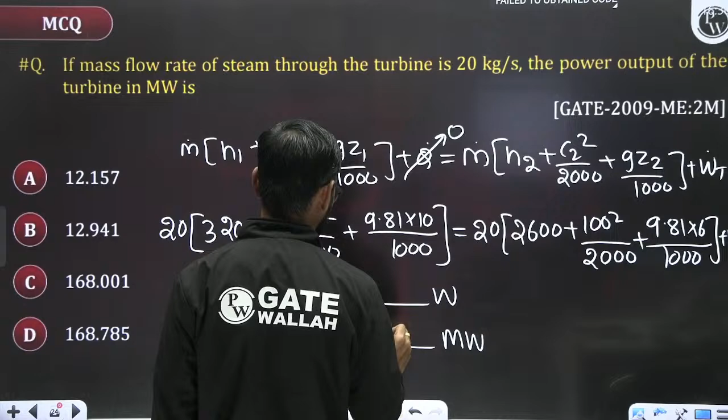plus WT dot. So what is value of WT? WT value is how much? So this value will come in watt, convert into megawatt. Just tell me what is the correct answer. So I am not calculating this, I hope that you all are calculating correctly only. The answer is 12.9.

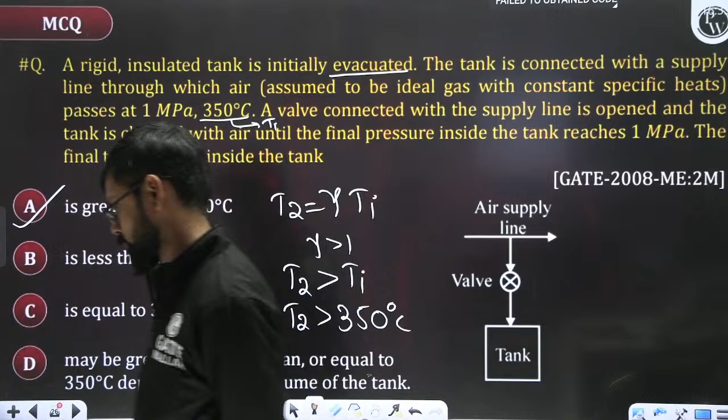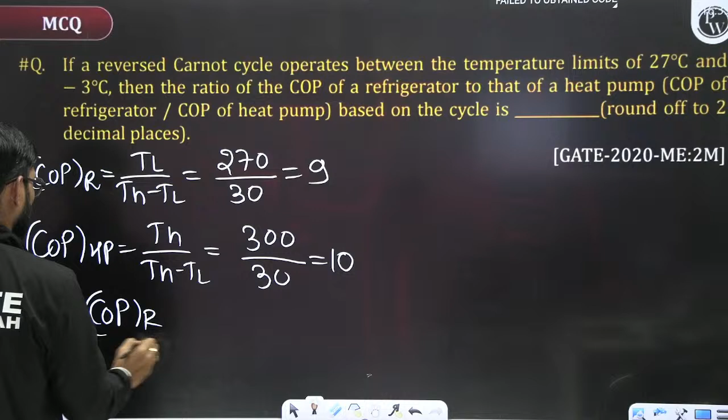And COP of heat pump value will come as TH by TH minus TL. So this value will come 300 divided by the difference 30, so this value will come 10. So the ratio they are asking, COP of refrigerator by COP of heat pump, will come to 0.9.

Next question. A heat pump absorbs 10 kilowatt of heat from outside environment at 200 Kelvin while absorbing 15 kilowatt of work, delivers the heat to the room which must be kept warm at 300 Kelvin. They are asking for the coefficient of performance of the heat pump. COP of heat pump, the basic formula is heating effect by W input.

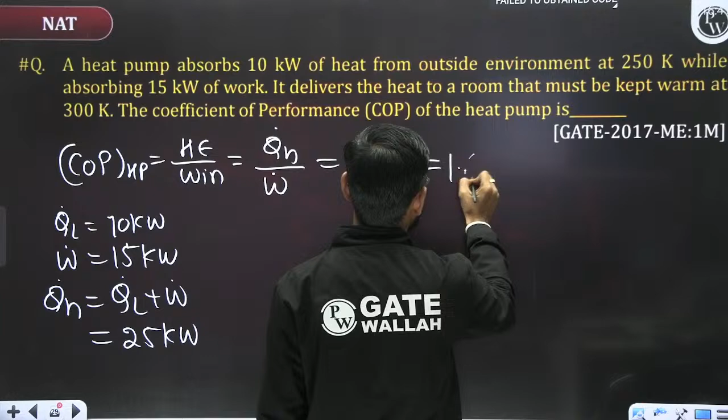A heat pump is absorbing 10 kilowatt, so how much is it supplying? QL dot value is given, this is QH dot by W dot. QL dot value is given as 10 kilowatt, W dot value is given as 15 kilowatt. So QH value will come as QL dot plus W dot, this value will come to 25 kilowatt. So here the value will come 25 divided by W dot, which is 15, so 25 divided by 15, how much will it be? 1.66667. Very good.

Okay, solve this problem.

A reversible cycle receives 40 kilojoule of heat from one heat source at a temperature of 127 plus 273, so 400 Kelvin. From 400 Kelvin it is absorbing 40 kilojoule, and from another reservoir at 97 degrees, that is 97 plus 273 equals 370 Kelvin, it is taking 37 kilojoule. The heat rejected, QR value, they are asking.

At 273 plus 47, this value will come 320 Kelvin. It is given as a reversible cycle. For a reversible cycle, cyclic summation of dq by t is exactly equal to 0. So 40 is coming at 400, plus 37 is coming at 370, minus QR is coming at 320, is equal to 0.

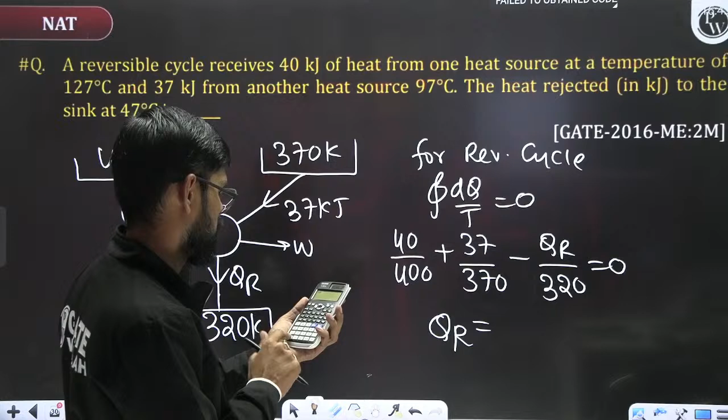QR value will come how much? 1 by 10, 1 by 10, so 2 by 10, which means 1 by 5. Is it 64? Yes, correct. Everyone solve.

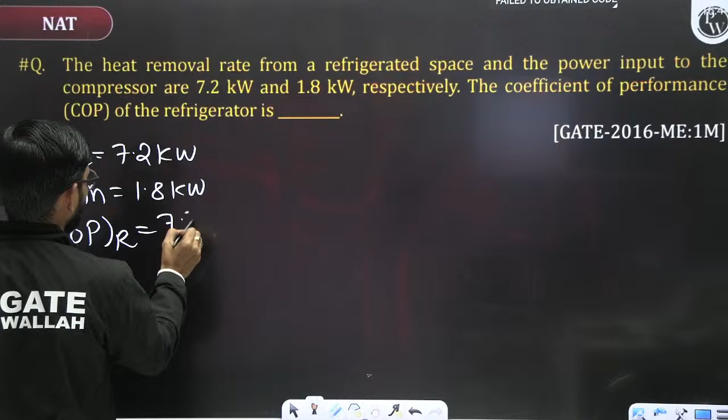Okay, now solve this question. This particular problem asks for the heat removal rate from a refrigerated space and power input to the compressor. So heat removal rate from a refrigerator, QL value, is given as 7.2 kilowatt, and W dot input is given as 1.8 kilowatt. The COP of refrigerator is 7.2 divided by 1.8. This value will come 4.

If someone has already attended that 10-hour session I took on the Hindi channel, the mechanical Hindi channel 10-hour revision session, you have seen that we solved very difficult problems there, a level above this mechanical paper. So you can see that very easy questions are coming here, even 1 mark or 2 mark questions.

A reverse Carnot refrigerator maintains a minus 5 degree temperature. The ambient is 35 degree temperature. The heat gained by the refrigerator at a continuous rate, so QL dot value is given as 2.5 kilojoule per second. Now COP value is how much? COP of refrigerator is TL by TH minus TL, which is equal to QL dot by W dot.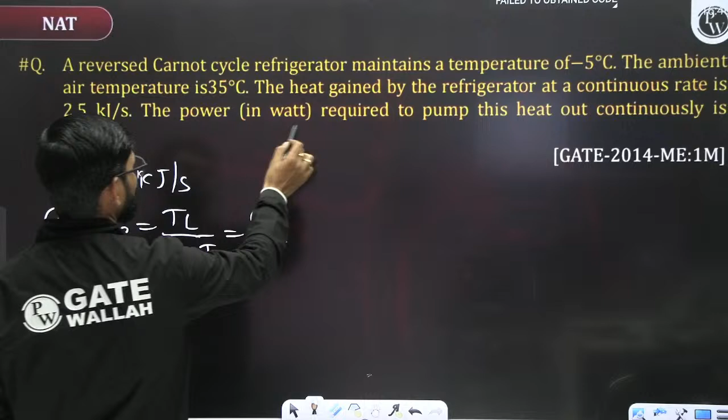The answer they are asking for is in watt. So TL value is 273 minus 5, which is 268, divided by TH value which is 273 plus 35, that's 308. 308 minus 268 is equal to QL dot. Now this is given in kilojoule, so convert into joule, 2500. Divided by, since joule per second is watt, we get W dot.

So 268 divided by 40. So I think it comes to 373.13 watt. Very simple questions were asked.

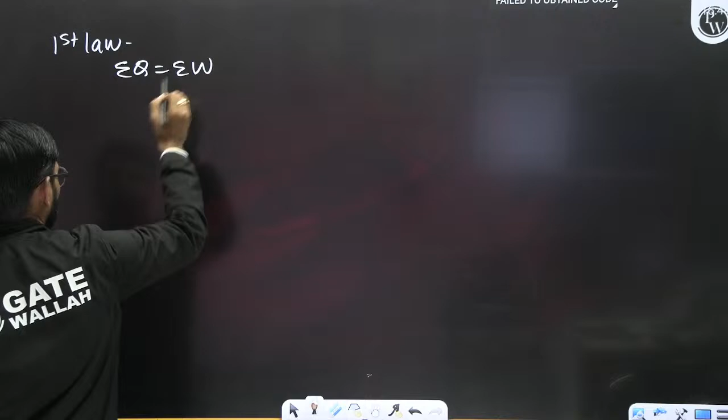One more thing you have to understand: here 100 kilojoule is entering, 50 kilojoule is entering, and 60 kilojoule is going out. If I apply the first law of thermodynamics here, sigma q is equal to sigma w. So 100 is entering, plus 50 is entering, minus 60 is leaving, is equal to w. So w value will come 90 kilojoule.

So work value will be 90 kilojoule, meaning it is a heat engine because it is producing work. Suppose if the work value comes negative, it means it is consuming work, so it will be a refrigerator. So it is a producing engine.

Now we have to check whether it is reversible or irreversible, by calculating the cyclic summation of dq by t. So 100 is entering at 1000, plus 50 is entering at 500, minus 60 is leaving at 300. This value comes to 1 by 10, plus 1 by 10, minus 2 by 10, which is 0. So it is reversible. Cyclic summation of dq by t value is coming 0, which means it is a reversible cycle. Now this question is related to entropy.

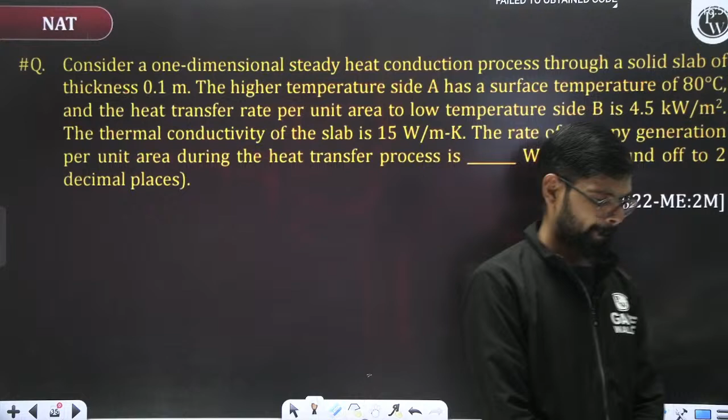Related to entropy: consider a one-dimensional steady conduction process through a solid slab of thickness 0.1 meter. Let's say this is a steady slab. Steady slab means whatever rate of energy enters, the same rate of energy leaves.

The slab thickness is 0.1 meter. The higher temperature side A is 80 degrees centigrade, maintained, and the heat transfer rate at the low temperature side B is 4.5. So the heat transfer rate Q dot value is given as 4.5 kilowatt per meter square, and the thermal conductivity is given.

Here a little bit of heat transfer concept is also involved. Just a minute, please.

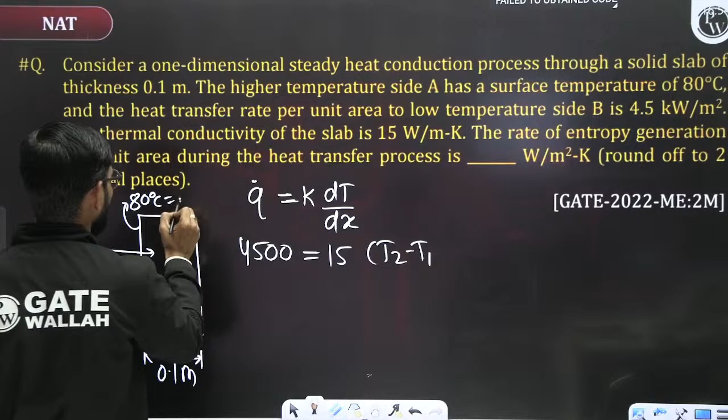Per unit area is 4.5, it is given. Thermal conductivity of the slab is given as this value. This value is 4.5 kilowatt, but given in watt, so we need 4500 watt per meter square equals K value 15, dt value is T2 minus T1. We don't know T2. Let's say this is T1. T2 minus T1 by dx is 0.1, and this is T1 minus 0.1.

50 degree centigrade, T2 is 50 degree centigrade. Now we will apply ds equals dq by T plus delta S generation. This value will become zero because it's steady. So dq by T value will come how much?

dq value, how much is entering? 4.5 is entering at what temperature? 80, so 273 plus 80, this value will come 353. 353, minus 4.5 is leaving at what temperature? 323 Kelvin.

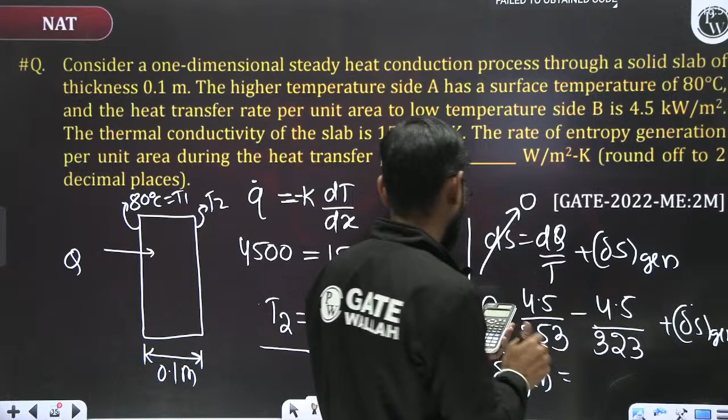Sorry, what unit is this value in? In kilowatt, right? So this value will come to 1.184 into 10 to the power minus 3 kilowatt per meter square Kelvin, but since they are asking in watt, the power of 3 cancels, giving 1.184 watt per meter square Kelvin.

So the correct answer will come to 1.184. Yes, 1.184 is correct, check it, 1.184 is correct.

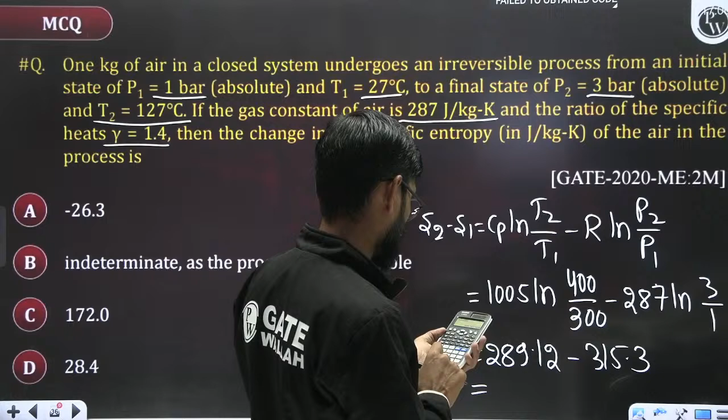289.12 minus ln 3... 80... 315.3... so minus 26.3. A is correct.

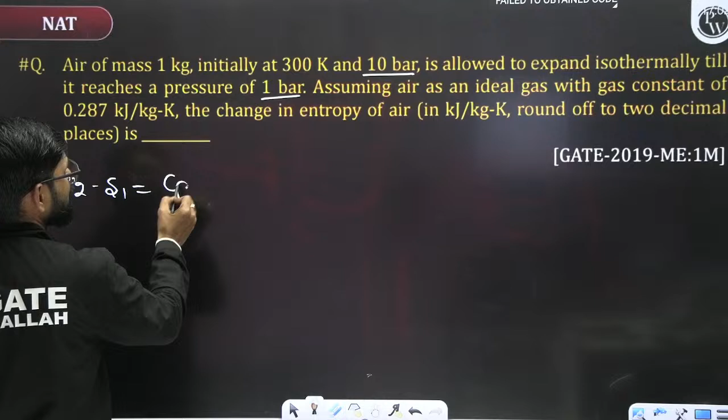So S2 minus S1 value will come how much? That is Cp ln T2 by T1 minus R ln P2 by P1. Right, so Cp value is how much?

Cp value is not required because this term is going to be 0 only, because T2 is equal to T1, isothermal. Isothermal it is given. So this value will come minus R. R value is

0.287. ln P2 value is 1 bar divided by 10 bar. So 0.1, right? So this value will come ln 0.1 into 0.287. So this value will come plus 0.66, not minus, plus 0.66 kilojoule per kg Kelvin.

Right? Okay, so we have solved the majority of questions coming from this particular portion. So I hope you all are able to understand.

Okay. Now the people who belong to the CE category, please listen here carefully. So these problems basically I have taken from this mechanical paper. Mechanical paper is 2nd of February, I think so.

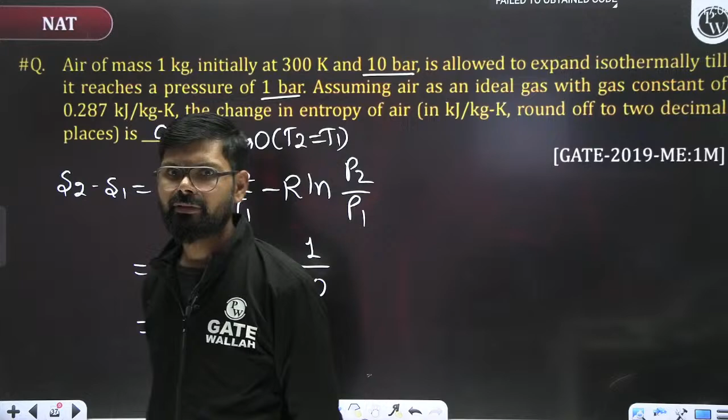14th of February is the CE paper. So the people who are preparing for CE and want some revision or want such type of sessions, extra topics, somewhat difficult questions, for them we will take some sessions after the mechanical paper. Okay, for CE we'll take some sessions.

Sir, can PSU take a job through CE? No, some PSUs are taking, but for this the rank should be very good, meaning under 10, 15, 20 like that. If your rank is under 10, 20, then you can think of that. Okay.